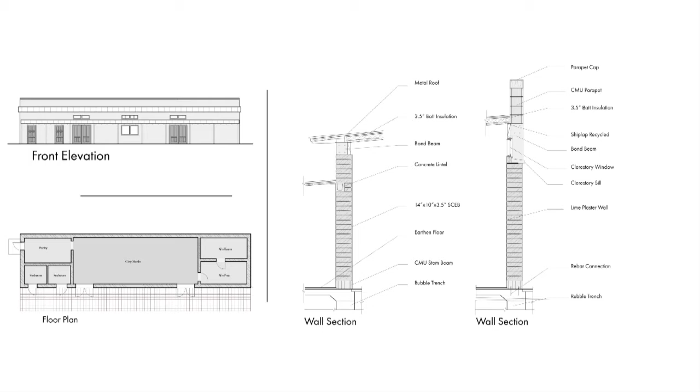So what I did was I measured it with a tape measure. Later I got drawings, and I got it more accurate. So you take the materials, and you figure out the total quantities, and I did that for both buildings.

And then you got to figure out where it came from. So you're basically looking at where does it come from, the extraction. You look at where it's manufactured and how it got to the site, the transportation. And that goes into every part of the LCA's transportation. That's usually where the most impact is done.

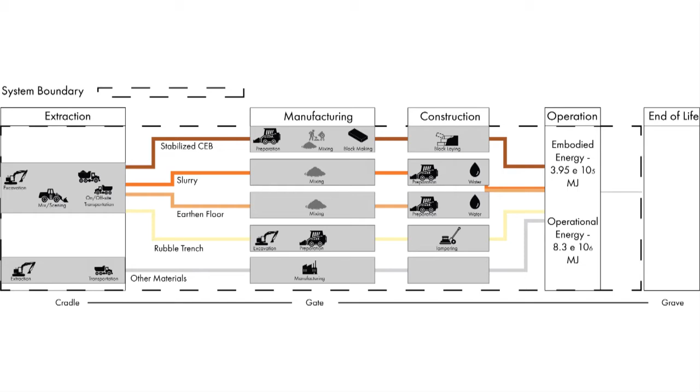Energy-wise, in the construction, for the life cycle assessment for the Mujeres Artes, what I did was I calculated everything manually, and it was a task and a half. I'm glad I took physics and chemistry and all those other math-related courses because I really needed it, especially physics.

And I did it all, and I came to the conclusion that I think I got it pretty much down. What I did, I didn't add that to the slide, to double check, to make sure there's a program called Athena Impact Estimator, and it's something I've used before. It's a great tool. You can use it for any building. You just have to know the measurements and put it into the program, and it'll tell you everything you need to know. The only problem is it doesn't have compressed earth blocks.

It doesn't have rammed earth. It doesn't have the alternative building materials. So what I did is I measured everything out and compared it to embodied energy, a ratio of how other materials like plywood, CMU, compare in how much impact they have in their embodiment. What I did there was just synthesize it a little bit.

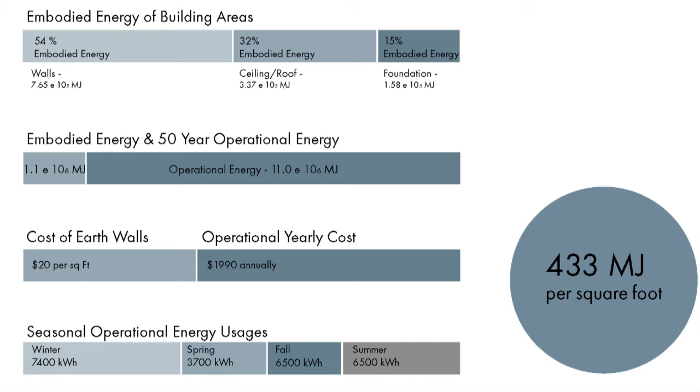What about the occupancy? That was another thing I was comparing - you need to compare apples to apples, oranges to oranges, but couldn't quite get it to work. San Anto has less people in it though - it's usually an after-school program for youth, as opposed to the Mujeres Artes, which is women there from about 9 to 5. So they're occupying the space more. Why their energy was higher, I'm not 100% sure, just looking at the energy bills, but most likely it's the air conditioning.

The embodied energy per square foot was 175 megajoules versus 433 megajoules of embodied energy. So it performed well in cost, it performed well over total cost, and it performed even better in embodied and operational energy - 55% less and 25% more efficient in operational energy.

So this project here will be presented at Earth USA on a poster. So when you walk over there, you go walk by it. I don't know if I'll be standing there, but you can look at it and say, I know that one.

Anyways, moving on - this is the master's thesis that I had. Basically, what I was doing here was trying to establish an off-the-grid farming complex. There's two things happening here: the main thing that runs the farm is the farm headquarters, and then there's another part over here, which is more of a co-op for people to understand farming sustainably, earthen materials - there's just two programs kind of going on, and they intermingle a little bit.

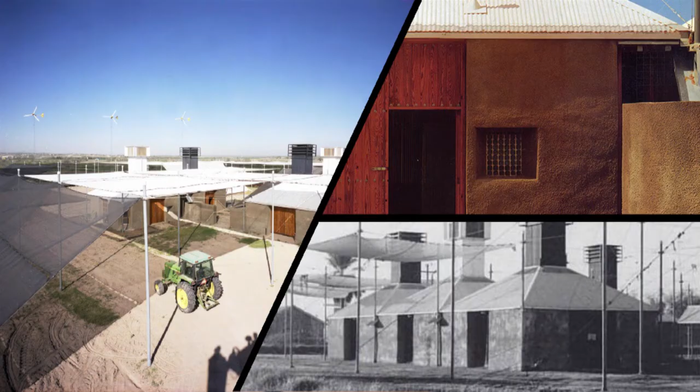This is a place up in Austin where people come and visit. It's Pliny Fisk's Center for Maximum Potential Building Systems. This was a farm he did back in, I believe, the 70s or maybe 80s, and it had a very small footprint. So I didn't have much I could take from this, but I took little pieces out of it. It was kind of like the beginning of my project.

So this is the site location, on the southeast side of San Antonio. I'm forgetting the name of this place right now, but it's right down the street from where I grew up, off of Roland and Rigsby. At the top right here is Rigsby, down here is Roland. There's a farm that's been there for at least 50 years, and it's only 5 miles away from the center of downtown. It's on a floodplain, which is probably why it hasn't been sold and built into houses yet.

But in the research, I learned that the best farmland is on floodplains. So it's 5 miles from the center of downtown. My main goal was to provide organic food, and I wanted the buildings on the site to be just as organic. The way I tried to prove that was showing that the buildings were to the Living Building Challenge standard, which is like a step up from LEED. They take it at a different trajectory than LEED does, trying to incorporate many other things like community, embodied energy, and other factors.

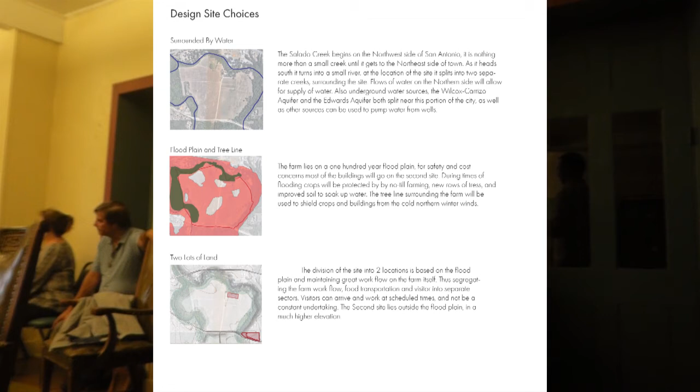So this is just a breakdown of how the site was used. Basically, what I took from Johnson's Backyard Garden was they used zones, and zones organize the farm in different ways. When I was going through this process, oftentimes I'm like, am I farming or am I doing architecture here? But when you think about it, there's really no difference because you have to organize both. So not only does zoning let you rotate your crops, but it puts the workers where they need to be at the right time.

Shown here are the 2 different headquarters in red. You have the farming headquarters, and then you have the cooperative market, bed and breakfast area. And there's the 2 areas.

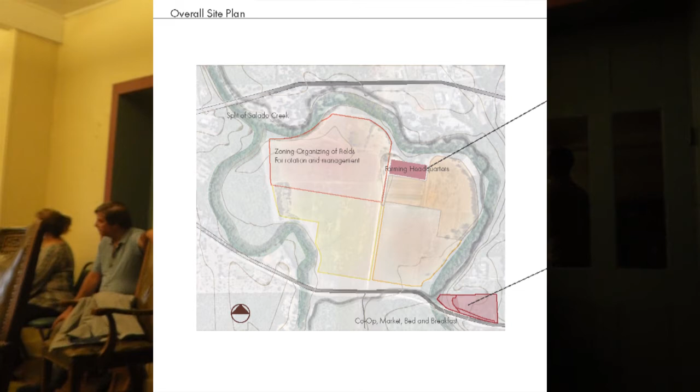For the farming headquarters, I took the program and basically the buildings of Johnson's Backyard Garden and put them on the site, as if Johnson's Backyard Garden moved here and had this different idea. I didn't try to do too much with it because there's a lot of farming technical things that I didn't want to cover in the project.

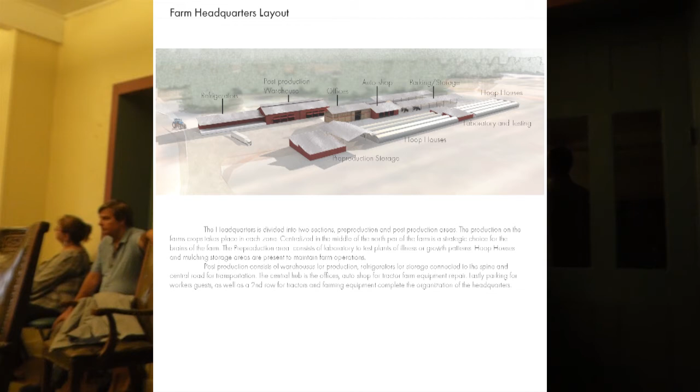The next thing was beekeeping. I think we all kind of understand how beekeeping interacts between nature and the built environment.

Another thing that was possible was insect hotels. Lots of extra wood and debris could be used to house insects, and the insects would go from the house out to the fields. It's basically promoting good insects to eat the bad insects.

Chicken tractors was another one. You basically build a house for the chickens that you can move over your crops, and they would eat up the bugs. That way, they're also protected from bad animals that can get to the chickens.

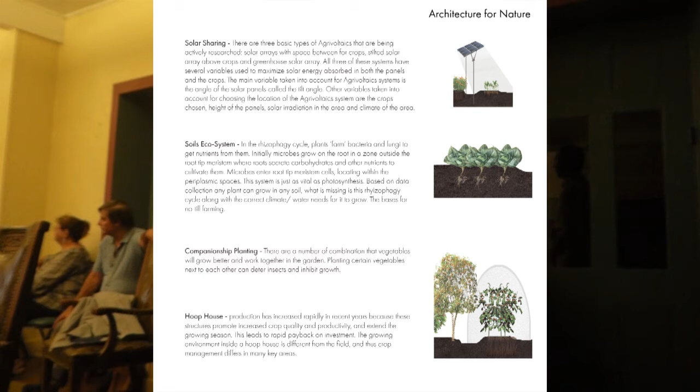Now to the actual building of the architecture and the design process. The building went here, most likely, because there was less trees. Part of the Living Building Challenge, which I'll get into in a minute, was low impact. So if I put it here, it was because there was less trees and it wouldn't interfere with the surrounding area.

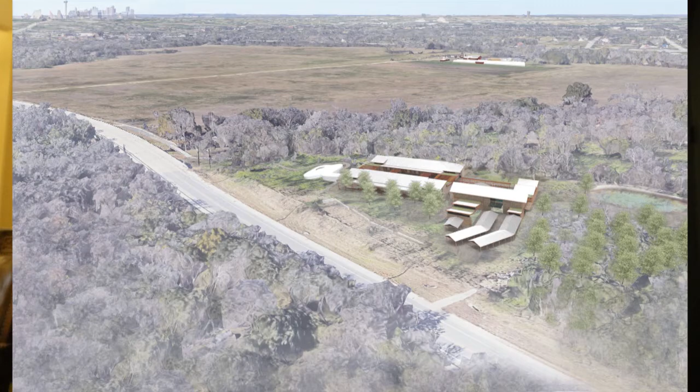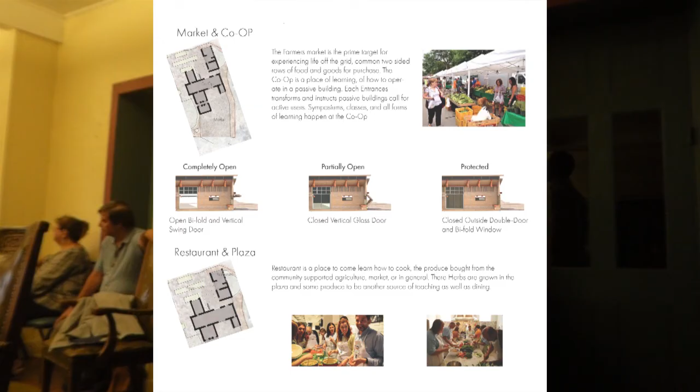Just to walk through the floor plans of it real quick: it was a bed and breakfast, or I'll walk through it this way, it was kind of an experience. As you came in, you would first go to the market and experience the crops, and you would go to the cooperative and learn how to do it. You even have a restaurant on site to learn how to cook and make the vegetables that you grow. And then if you stayed long enough, you'd be able to enjoy a bed and breakfast.

Then as you went through the next day, you can go back to the Salado Creek trails and ride bikes with connections to the city. There's two other things I'll get to in a second. The market co-op was just the initial idea to show basically why people would come. The catch would be the farm, to get the crops and the vegetables and everything that's there.

The restaurant, like I said, was to let people experience what the food would taste like and how to cook it. The bed and breakfast was just to share what it would be like to live in an earthen building or different off-the-grid systems. There was a wetland on the site, so all of the water used, or fecal matter, or waste went through the wetland.

It would be composted and possibly reused, or drained out to the Salado Creek. And there were two other things that I thought would really catch people's attention too.

A natural pond, which you use as a swimming pool, basically looks like a pool built naturally into the landscape. The natural pool system uses plants and other material to clean out the water so that it would be completely clean. With that being said, these natural pools operate more efficiently than the pools most people have in their backyard.

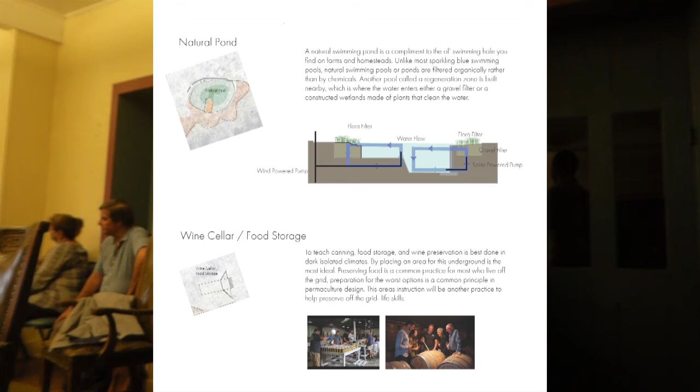Lastly, the last few slides are about the Living Building Challenge. The Living Building Challenge is made up of 7 petals: energy, equity, health, beauty, materials, place, and water. I'll go through these rather quickly so we can finish up here, because it's really hot in here today.

The first was place. The building had to fit into place in several different ways. One way I did that was by looking at the aquifers and the water that would be needed for the farm, as well as the bed and breakfast and market area.

Another important thing to decide was how it connected to the city and how it connected to have a low impact. One of the main things that goes through the site is the Salado Creek Greenway, so there was a connection between the city and the farm so people could enjoy things like bike riding along the Greenway. The low impact of the area, since it's farmland, would meet the requirements of the Living Building Challenge.

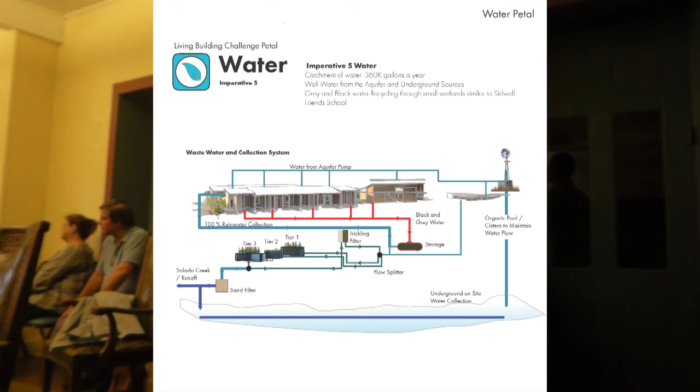Then getting to energy, which I just took from my project on the Mujeres Artes. I plugged in the energy calculations I got and used them for this, and it met the requirements. It was very efficient in embodied energy.

Something else that the Living Building Challenge asks for is health. There are lots of petals that it requires that I'm not going over, but I'm just trying to hit the highlights here. One of them was great, efficient daylighting, which would promote good health inside the building, and it had really great requirements for it.

Here are the materials used on the site - they would all be local materials. Something I grabbed from Pliny Fisk was his use of local vernacular materials, and all the materials he used, I used in this project. Here's another breakdown of the materials.

The last couple that are here get kind of vague because they need to really be designed and built to connect to human scale. The whole process of moving from the market through the bed and breakfast to the city, or to the Salado Creek, was all part of that, and how it fit to human scale.

Beauty, spirit, and education - that was the whole purpose of the project, to show how beautiful earthen construction is, how great it is in the built environment, as well as farming, and how that could be applied.

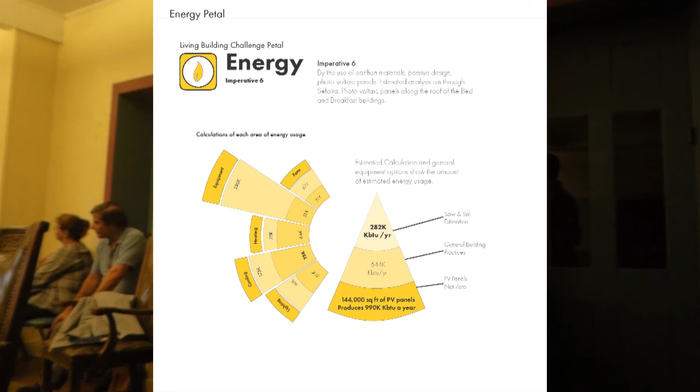And that's my master's project.

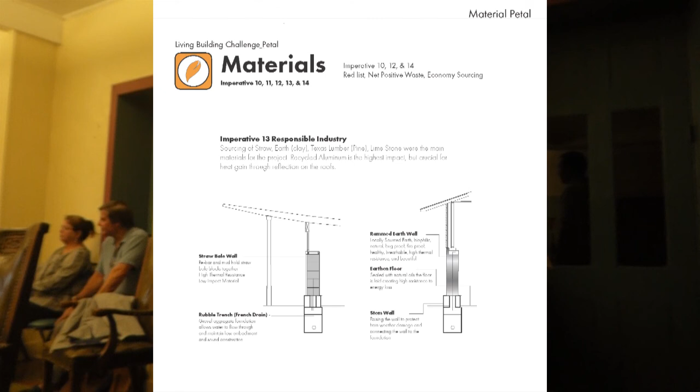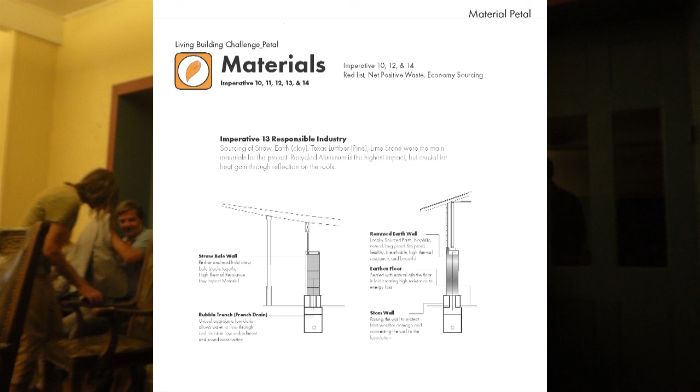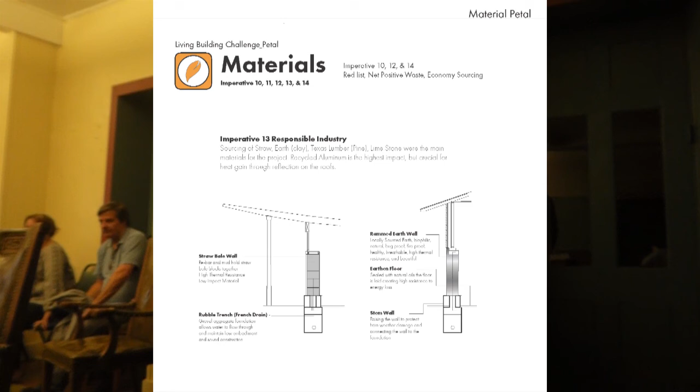Any questions? Have you seen the movie Biggest Little Farm? I wanted to, it's on Netflix. This happened right after it came out, my project. I had just gotten done with it and hadn't slept in weeks. It's an amazing movie, and it's basically the same concept. I totally forgot about that. The couple started out with an absolute trashed piece of acreage, just deader than a doornail, and over the course of 8 to 10 years they brought it to a very luscious life. It's incredible, I encourage you all to see that movie.

I have a question too. Sure. In a similar vein, do you know about the Texas Farm and Ranch Freedom Alliance? I do, I came across that through Johnson's Backyard. Yeah, they're doing amazing work, and I bet they'd love to get a copy of your book, and you could connect with all kinds of really great people. I'm a member and I've been watching them, but I haven't been able to go to any of their conferences, I had a direct conflict. They had a big dinner in San Marcos back in August with grass-fed beef and all kinds of organic vegetables, and they had some really good speakers, so I hope to be able to go. But they're really pioneering, and they do legislative lobbying too, so I bet they would love to know about you and what you're doing. Thank you, yeah, you've done well. They're pretty friendly people.

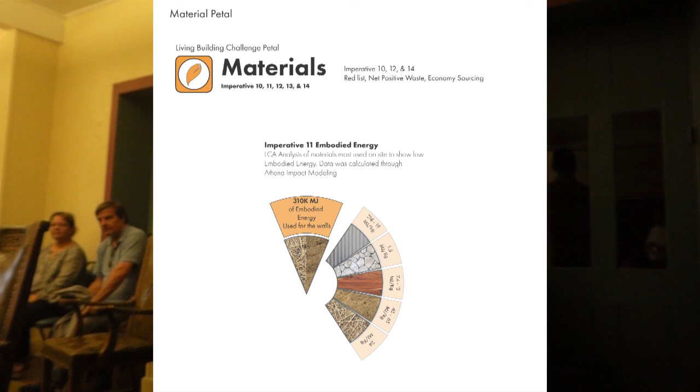I'd point out that we used an earthen floor and rubble trench foundation on the Mujeres de Artes project, and we cut the carbon content of the foundation by 50%. Wow.

So earthen floors are good for you. There were other things about that I didn't mention. I talked to the groundskeeper there, I forget his name, and he mentioned a couple of design strategies that, in hindsight, would probably be better. He said the energy would spike in the winter because the women would bring their space heaters and put them on their feet. He said, I think it's the floor, it's too cold for them.

He mentioned other things too. The dual split air conditioning system was just cranked for the first 4 or 5 months it was there, and he kept thinking, why is it so cold in here, why don't we just turn it down? Once he turned it down, the energy bills would go lower. You have to learn how to fly the buildings in terms of balancing out their cycles, knowing when to put energy in and when to take it out, because it's completely different from other buildings. Right, exactly. He said he'd crank it until about noon, and then it would coast the rest of the day, so he turned it off at night.

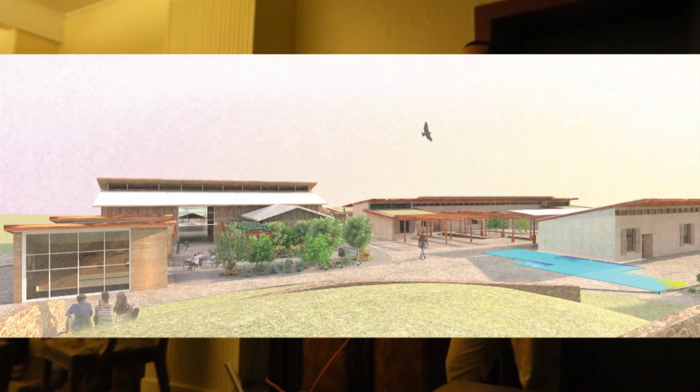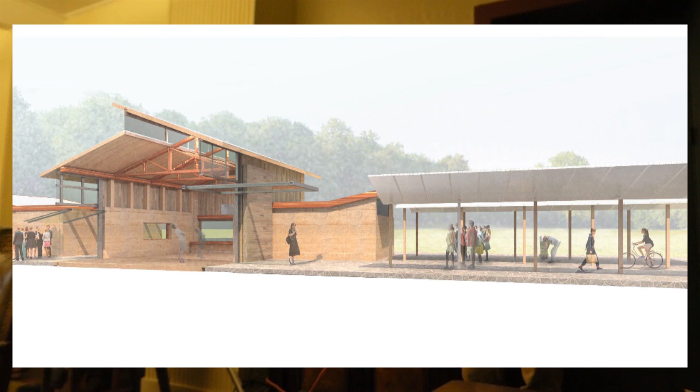That was a question I had too. I asked about that, and he said no heat comes off of it, and told me to go ahead and touch it, and I did. Oh, that's not true - he said it was running, and when I put my hand near it, not on it, I didn't feel anything. Well, I don't know, the one they're using now - I know they've had more than one, it's different. Yeah, they have 2 there, so it's different.

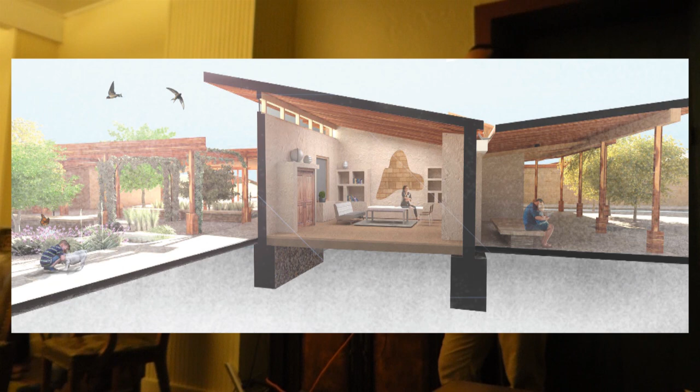It's also partly the humidity you have to deal with. The kiln dries things out, so that's true of kilns too. It's just something we need to consider as we build - the specific activities that are going to happen in that building, which can be very different than if it was a residence. But it's an amazing building, it's just...